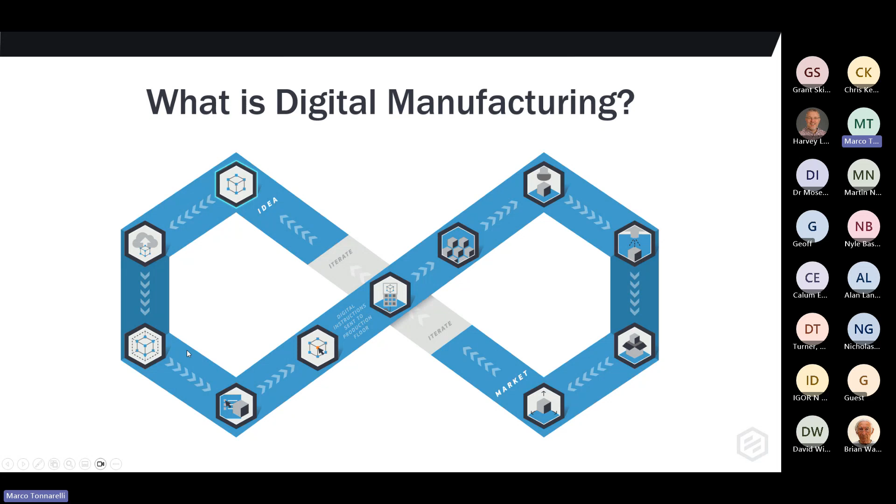You may already start thinking why digital manufacturing is important, when it is important. The main key factor that you can see here is the lead time. In this way, you can forecast the possible problems or challenges that you may have much earlier before even you spend any money on sampling or on production.

You can see here the time to market with digital manufacturing is about 6 months, while traditionally it could be 12 months or even more. So you will have savings in terms of money, savings in terms of time, and also you can start your verification and validation much earlier than in a traditional manufacturing system. This means you can see problems and be able to solve them much earlier and get to the market with quite a solid solution, be the first to the market, and this will give you a very high competitive advantage.

Here's what I mentioned before, the DFM, design for manufacturing. This is an example of an injection molded part. You upload the CAD model, and we highlight, for example, the ejector location, so you can see exactly where we're going to place that, and where the gates will be placed for injection molding. The different colors represent the different components of the tool. You can see the thick areas where parts may be at risk of sink, and thin areas where parts may not be formed.

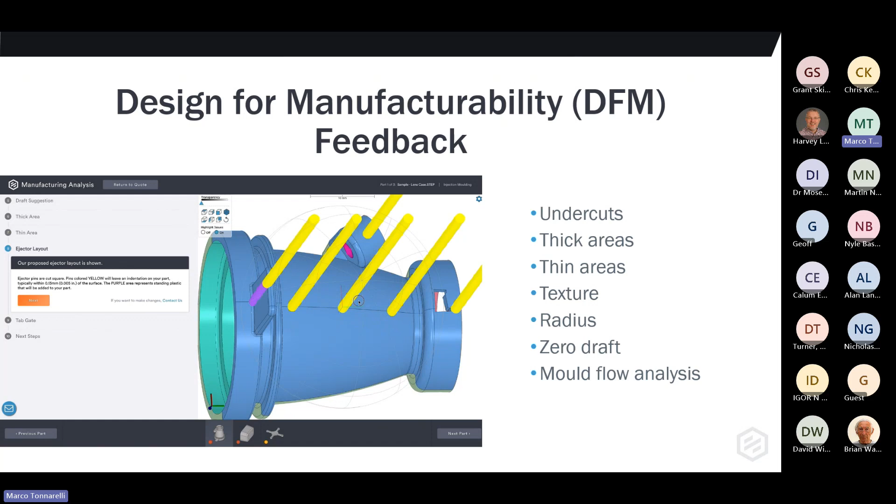You will receive these DFM reports for every single part and every single process you upload, with a brief description of the issue and possible ideas for a solution. But of course, you can always talk to a human being. You'll have a dedicated account manager, and you can book a meeting with me or any of my colleagues so we can review your part in detail. You can tell us your ideas and constraints in terms of application, and we'll review it from our manufacturing point of view to find a good solution that works for both parties.

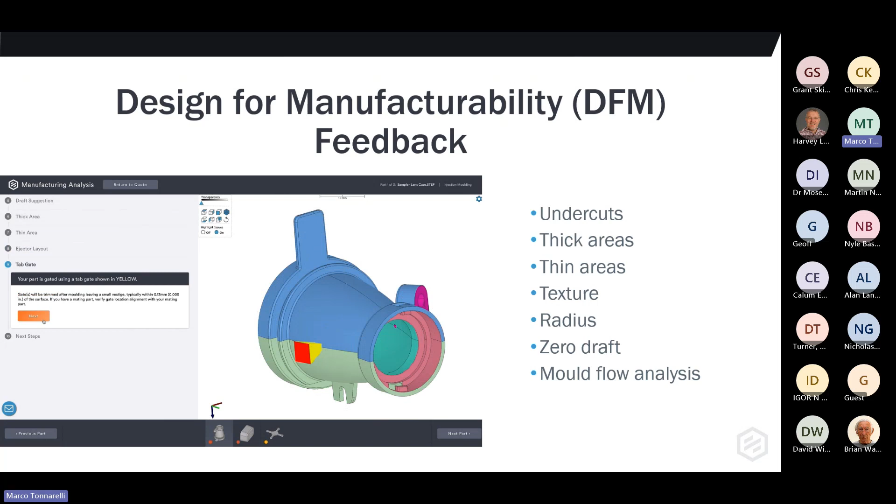I've mentioned already a bit about the manufacturing processes. There are 3 main manufacturing processes that we work with. The first is 3D printing.

Generally, 3D printing is a digital manufacturing process, though not the only one. 3D printing is additive manufacturing, meaning we build the parts layer by layer. We can start from a powder or a liquid polymer and build your part exactly as the CAD model you've uploaded, for both plastic and metals. There's no minimum order quantity - it's just one part. There's no tool involved, so it's very cheap, very cost effective.

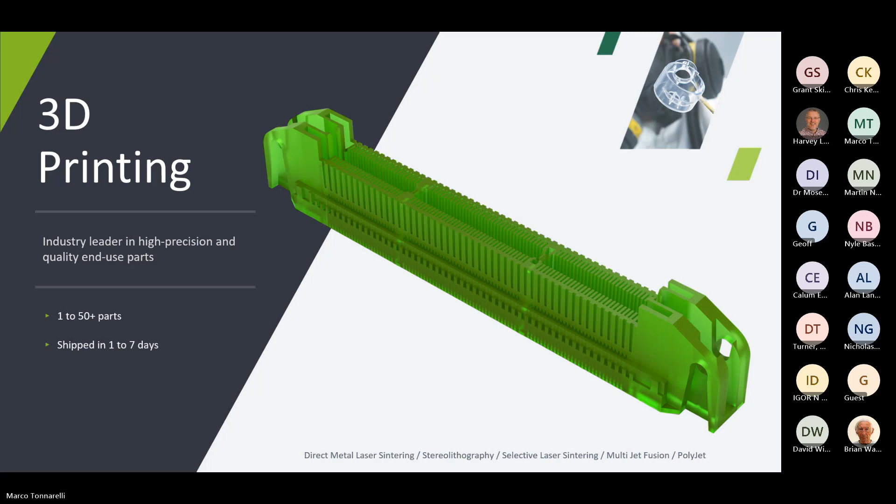The lead time is also very short, from 1 to 7 days. It's very cost effective for small quantities, so it's very good at the early stages of your product development, so you can see the first parts and start to verify how they work. For high volume, this system isn't always competitive, although for metals, direct metal laser sintering, there are many cases of these parts being used in real applications - for example, in the aerospace industry, because of the lightweight benefit, weight reduction is very important in that case. That's why DMLS is used in these cases.

The other manufacturing process we offer is CNC machining. This instead is subtractive manufacturing, meaning we start from a block or rod of plastic or metal and remove material to obtain the geometry you've uploaded. Also in this case, you will receive the DFM - you'll see if there are any critical areas, any feature that cannot be machined, or if there will be some added plastics or leftover material. This also doesn't need any equipment, so the minimum order lot is 1.

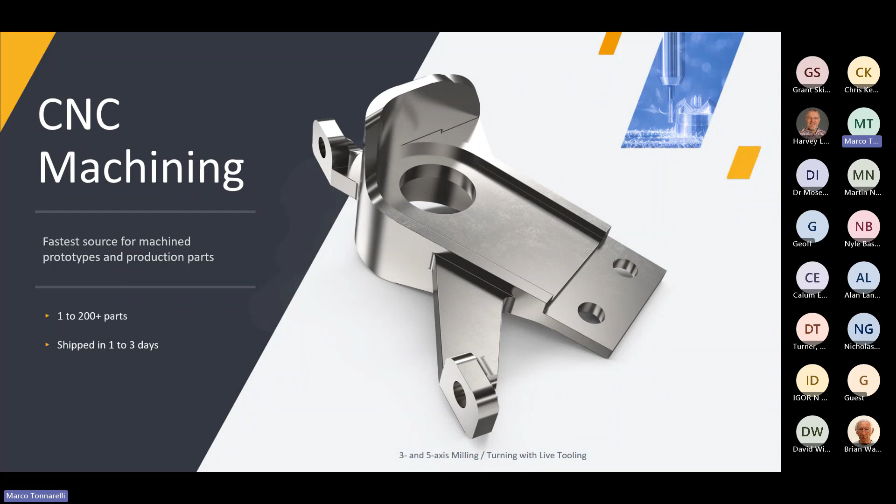CNC machining is even faster than 3D printing - we're talking about 1 to 3 days, depending on the geometry, so also very cost effective, and it can go up to 200 parts. Generally, it's quite competitive. The advantage here is that you can have the real plastic that you'll have for real production. In 3D printing, generally some resin is used that isn't exactly the same material you'll find in large volume production.

And the third one is injection molding, which has been around for 100 years. But we've been able to redesign it, to squeeze this process into 15 days or less. This is exactly thanks to digital manufacturing. You can upload your CAD model, and we simulate the production process of the tool and the injection molding of the part, and we can highlight the critical features. At the same time, we can calculate very precisely what the cost of the tool and the cost of the part will be. And when we go into manufacturing, everything is related to that. Therefore, we can cut the time and allow the parts and tool to be produced in 15 days or even less.

Of course, we need to include here the cost of the tool, but it's an aluminum tool, so generally it's quite cheap, and we can guarantee the tool for life. So you can reorder as much as you want, we will take care of the tool forever. This is very effective for medium to large volume production, up to 10,000 parts, and it's still considered a very fast manufacturing process, especially compared with traditional injection molding time.

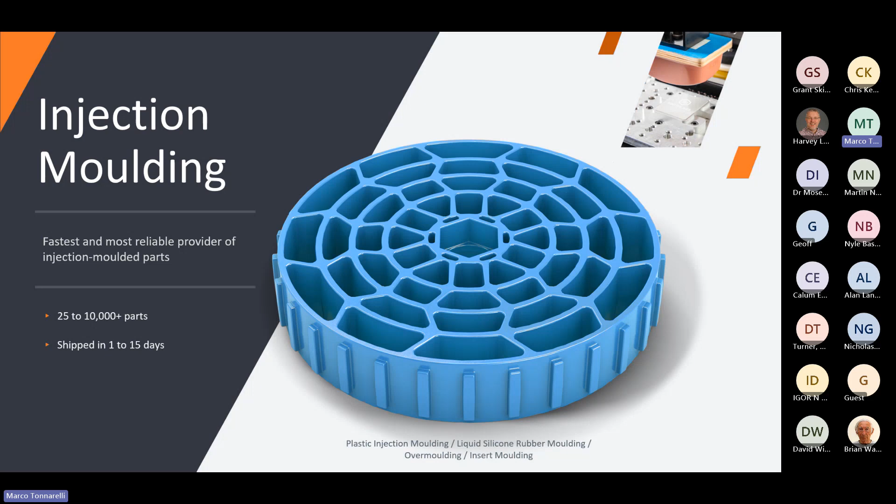On top of this, we have secondary services. This is done case by case, because after you've machined or molded a part, that's never the end of the job - there's something else that can be done. For example, we can offer laser etching, pad printing, spray painting, anodizing, and many other things done case by case. Depending on your needs, when you upload the CAD model, you will have the possibility to leave notes or upload drawings to explain what you want to achieve after the main process. You'll receive a quotation that also takes into consideration the elongated lead time and extra costs, giving you the possibility to customize the part exactly for what you need.

As mentioned before, we also have a network of manufacturers - partners around the world that can cover what is not covered by our standard process. For example, very big parts outside our envelope, or large volume production. As said before, for injection molding, if you need millions of parts, we are not able to offer it, but there are manufacturers that can. Or if you don't need a fast lead time and your main goal is very cheap parts, this can be done through the network. Very specific tolerances or production processes can also be offered through the network. The platform works the same way - you upload the CAD model, select what you need, large volumes or high tolerances or whatever, and you'll receive a quotation exactly for your needs.

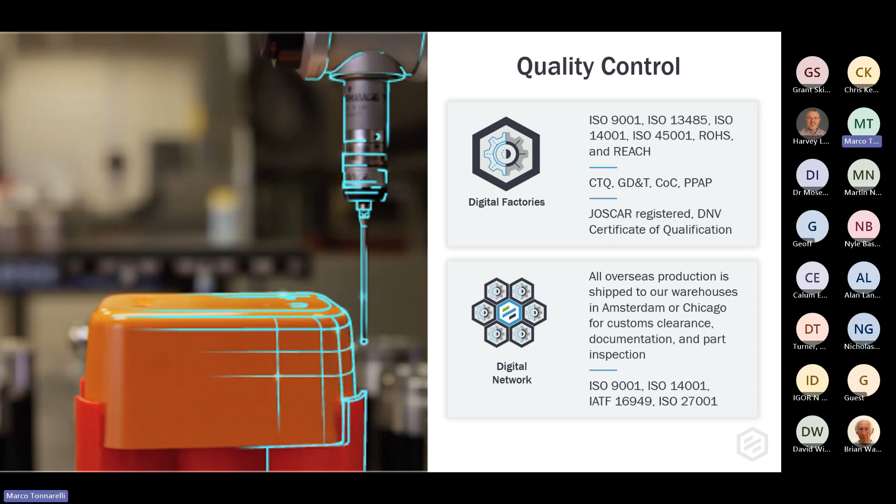Now we can have a look - this was the theory. Now we can look at some real cases, some case studies, to see what we have done in reality.

This was a very expensive vodka brand, and we designed and realized the 3D printed cap of the system, designed through just 2 iterations of 3D printing. Then we were able to go to injection molding within 3 weeks from the original idea - the part was ready for the market.

The second one is a rescue drone that is able to help people in danger at sea before the actual rescue team arrives. In this case, we were able to 3D print the body of the drone and allow the company to make the first test, the first validation, very early in the development of the project.

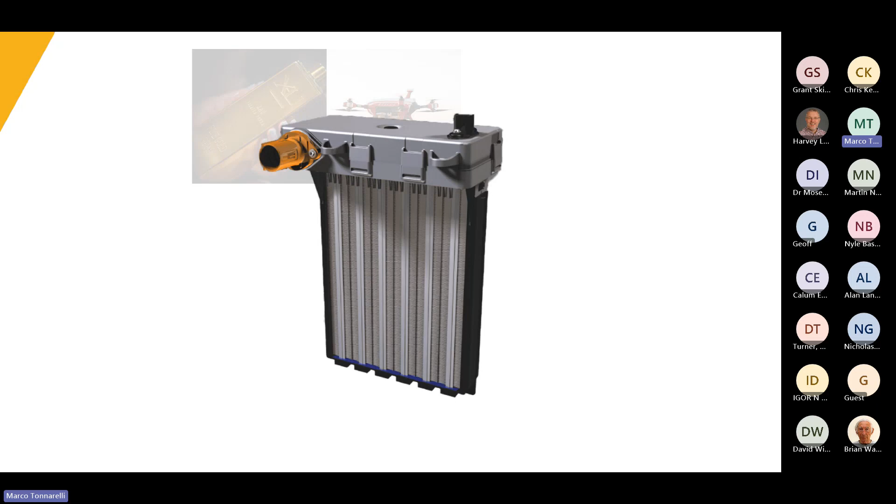This is an example from the automotive industry - an assembly of about 30 to 40 components that were redesigned a little bit to be CNC machined. Within a few days, we were able to deliver these component assemblies for the company to make the test.

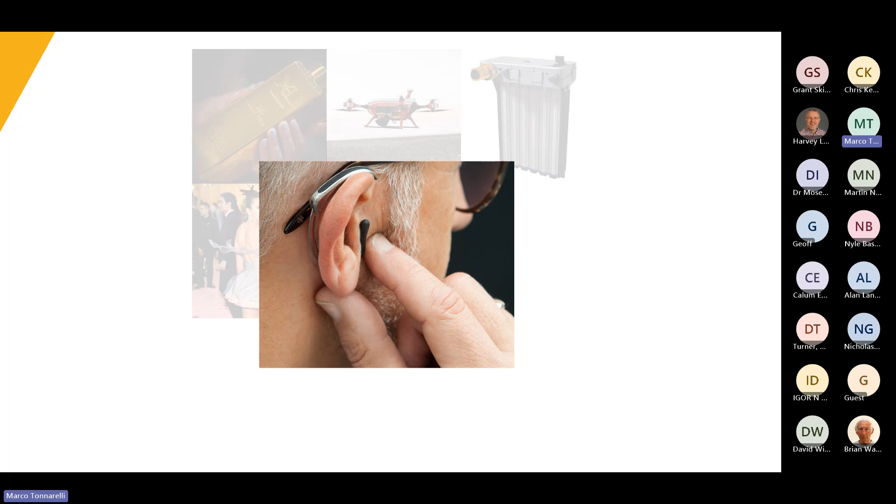This one is for medical application, a medical device for noise reduction for elderly people. These were components in silicone rubber and metal. Again, within 1 week from the idea, they were able to test this with a human being and see if the design was correct, to see if the idea was valid. After a second iteration, probably the part was already ready.

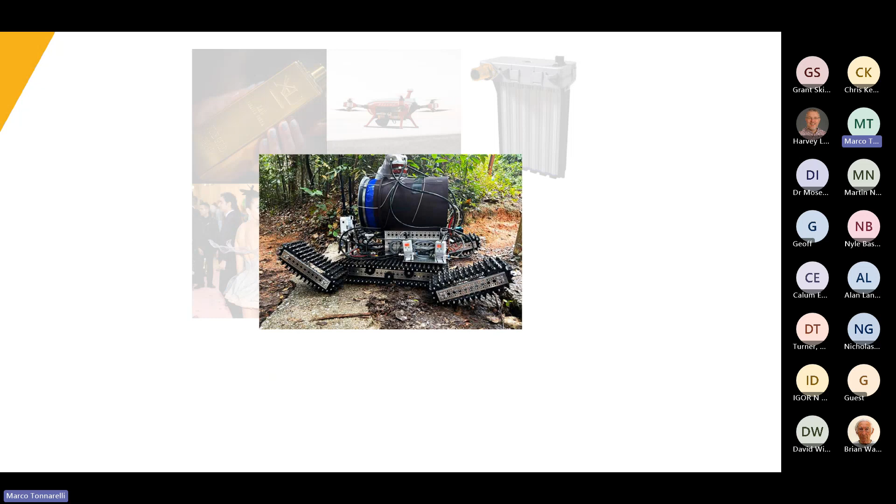This one is a robot to explore the rainforest. A few components in CNC and 3D printing. This gave the developer the possibility to develop the idea in parallel with receiving the parts. Basically, they were doing assembly - when they received the parts, they made the assembly and validated the idea right there, very, very early in the stage.